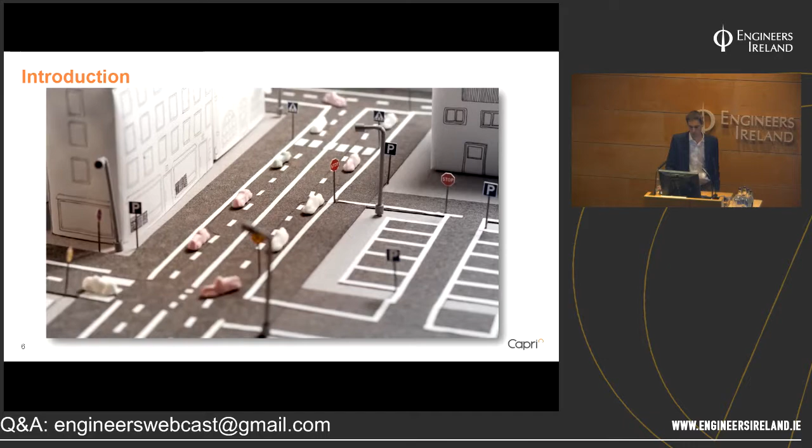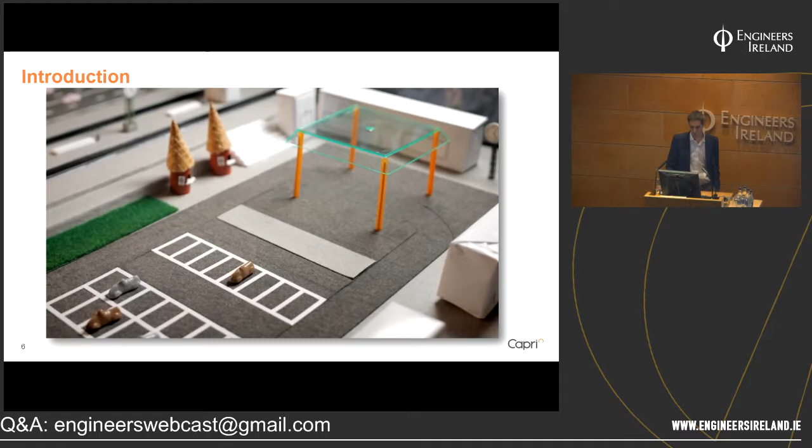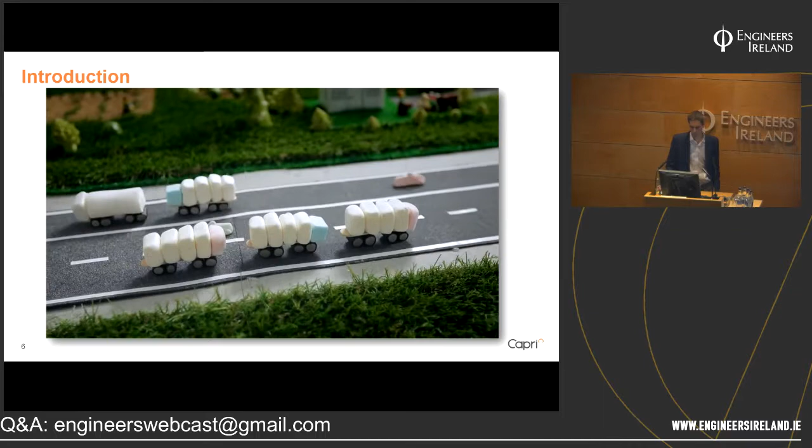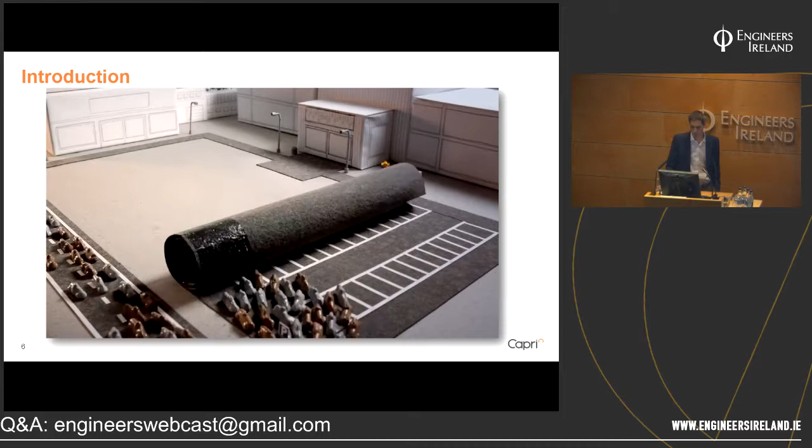Our city has grown up pretty much like all other cities, and it constantly changes. We become more people, the city grows, we build houses, more roads and parking lots, more vehicles. But human beings also need space. So what would happen if we drive away the cars of today and start using autonomous cars instead? Autonomous cars don't need any signs, and autonomous cars need less space, enabling wider sidewalks. It creates more space for us humans. And autonomous cars can drive and park themselves somewhere else. Look at this commuter station - you will be picked up as soon as you leave the train, because autonomous cars know when you arrive. So this reduces waiting times, less pressure, less stress, and autonomous cars will take you all the way home. Check out these autonomous trucks - they're driving close to each other because they automatically line up into road trains. This saves loads of energy for transport, and that is good for all of us. And since the autonomous vehicles communicate their arrival times with their destination, the loading and unloading can go so much smoother. And when the trucks don't have to stand and wait, they can use their parking lots for other things. Look at the front of the shopping mall, it's just a lot of parking lots. We would not need all of them anymore. We could do something funny - it could be a park instead, with an outdoor swimming pool and a cinema. This is a place to live in. So with autonomous cars, more space is created around the needs of people. Cities become nicer and more beautiful. Streets become safer, travel smoother, less noisy, more space for life. Well, it will be better.

Okay, what do you think about that? Does that make you think, wow, this is going to be the future, isn't it? Isn't it absolutely wonderful? The reason I like that video is because it gives one view of the world under autonomous vehicles, and it touches on a few key parts, like the autonomy side of things, the connectivity, the land use, some of these different benefits. But in my view, it certainly puts it through rose-tinted spectacles and sets out what the future could look like. And really, through the Capri projects, we're trying to understand some of the practical implications of these things, and importantly, how do we actually achieve some of the benefits reported here, rather than it just happening through osmosis naturally.

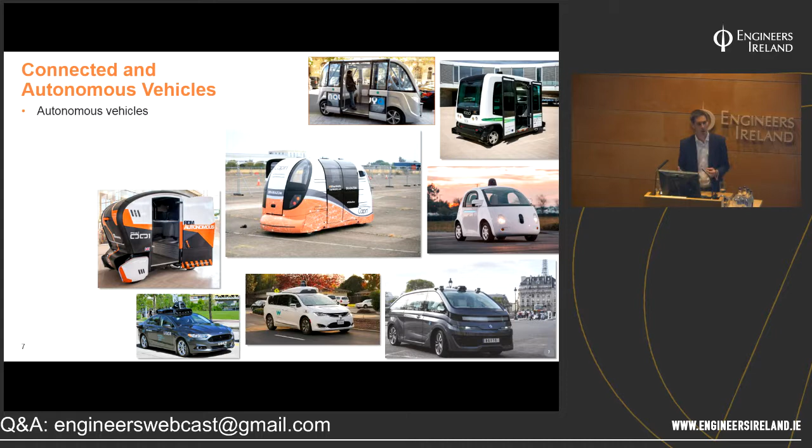Some of them do have a steering wheel in there, and a driver might be able to take control of the vehicle at certain times. I'll come on to that in a minute. But principally, the vehicles are driving themselves, and they have sensors built into the vehicles so that they can see the world around them, and importantly, they know where they think they should be within that environment as well. So that's the first thing, they are autonomous vehicles.

Second is that these vehicles are connected as well, and often you talk about CAV in one - connected and autonomous vehicles. You talk about these in the same breath, but actually they're very, very different aspects of future technology and the impact that these things will have.

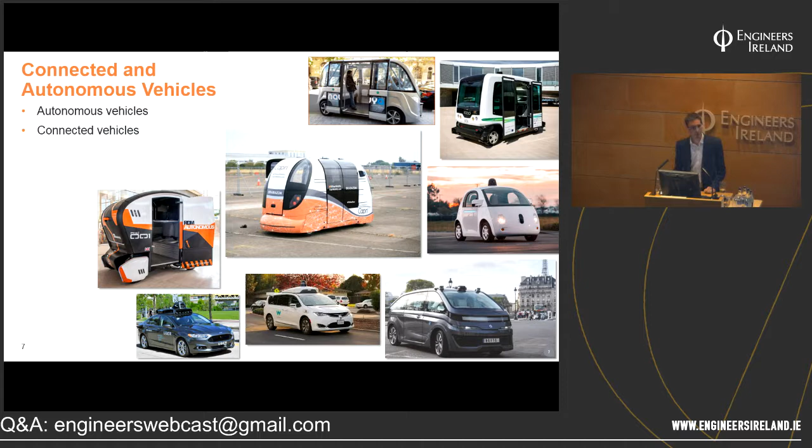Connected vehicles are vehicles which are perhaps connected to each other, talking and communicating to each other. They might be connected to the infrastructure around them as well, and the infrastructure might be talking to them. Some of these things are happening already, but in terms of how the technology can develop further, there's tremendous potential for additional connectivity within vehicles, and also connected not just to other vehicles and the infrastructure, but to the people as well. So the vehicles might be connected to people that might be hailing the autonomous vehicle, or they might be actually connected to people within the vehicle, within the pod, providing an enhanced experience to those people in there.

Thirdly, lots of these vehicles are electric. This is the way lots of the vehicle fleet's going, a move gradually from petrol and diesel over to electric vehicles. And we're really seeing, in terms of the technology uptake, probably the electric part, very much now on a practical basis on our streets. In terms of the actual range, anxiety seems to be coming down. And all of these autonomous vehicles which are being trialled and tested, the vast majority of them are electrically powered.

And the fourth part here is less about the technology on the vehicle, but some of the enabling technology which might allow a different way that these services are provided to users of transport. Principally, this is the idea of shared ownership of vehicles. So rather than owning a vehicle in its own right for yourself, vehicles might be shared or pooled. And again, we're seeing this being used more frequently, and the uptake of these is happening quite rapidly, particularly in busy city centres. And then shared trips as well.

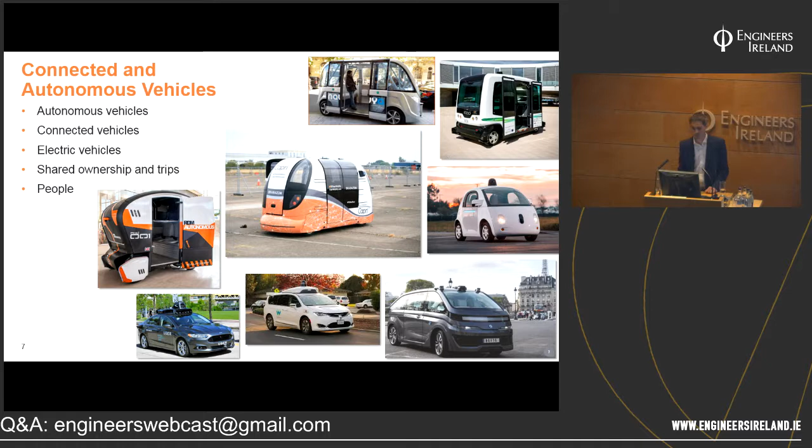So that's 5 key elements that are important to distinguish apart from each other.

In terms of the key benefits, the first one is safety. This has been reported lots in terms of the development and research funding going in. There's a famous statistic that around 90% of accidents are caused by human error. If vehicles are autonomous, in theory you can have a safer transport system and accidents could be reduced. That's one of the proposed benefits, particularly linked to autonomous vehicles. Some connected vehicles can also help improve safety.

Second one is congestion. Less so on the automated side potentially, but maybe if vehicles are driving closer together. In terms of the coordination of vehicles in a city centre, or the preemptive nature of understanding what trips people might want to take, and a more efficient transport network, CAVs could in theory improve congestion within our road network.

Productivity - for automated vehicles, people who are driving manually, that's the task they're doing in the car. If they're no longer driving, they have much more time on their hands, and so in theory they can be far more productive, whether from a work point of view, a social point of view, or a relaxing point of view. Time can be pulled back and used for other things as a result of automation.

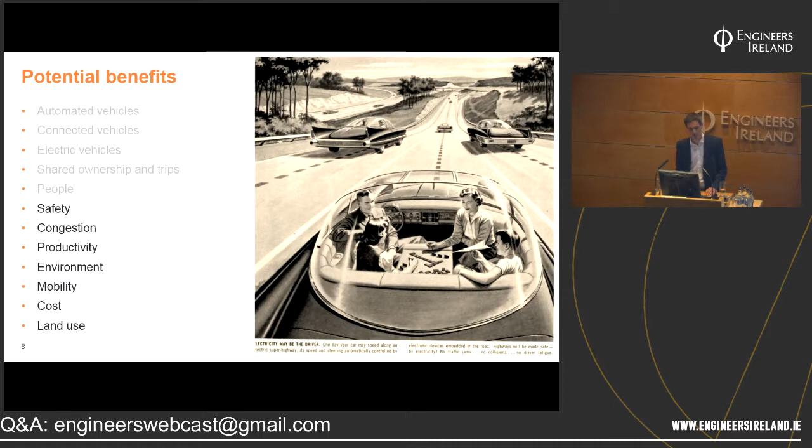So that's 7 potential benefits which are reported amongst governments, within the media, and within various researchers as well. I think it's important to think that some of these benefits - we're not actually sure whether they will be benefits, and when you try and flip it around the other way, sometimes you might think it could have the opposite impact. For example, safety.

A few people were umming and ahhing when we first had the poll at the beginning. If autonomous vehicles aren't safe and they're rolled out across the world, what kind of impact will that have on our safety record? 90% of accidents are caused by human error, but what kind of new errors might be introduced as a result of autonomous vehicles if they're not done safely? Cybersecurity attacks, for example, either on the vehicle itself or in the cloud and communications, could have detrimental effects as well. So that's an important part to consider as part of the paradigm.

From a congestion point of view, we talked about easier access to the transport system.

Then potentially more people could be travelling, so potentially more vehicles on the road, and congestion may actually start going up. You can sort of flip lots of these different assumptions on their head.

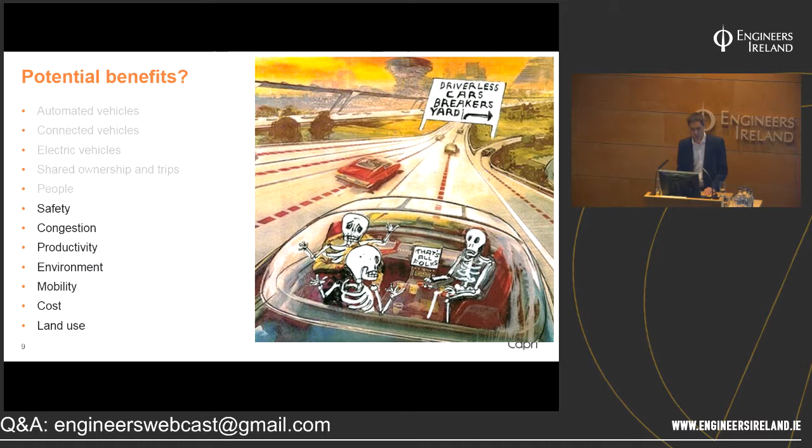The assumption is you take the driver out and the cost will immediately reduce. But actually some of the operational costs behind the scenes with autonomous vehicles, simple things like maintaining the sensor sets, keeping the cars washed and clean and effective, is a big part that needs to be considered - a new additional cost which perhaps isn't so costly at the moment with manual drivers. All these things need thinking about when we're doing the research and working on the various projects.

Okay, levels of autonomy - who's familiar with levels of autonomy in terms of automation in vehicles? A few people. I'll touch on this briefly, but the scale goes from left to right, from vehicles which are not very autonomous at level 0, all the way up to level 5, which is absolute full autonomy.

These first three levels represent the way some of the vehicle fleet is moving at the moment, in terms of assisted braking. Some vehicles currently have lane departure warnings - for example, when you're driving on the motorway it might give you a warning. But critically, you are still driving the vehicle in these three levels, level 0, level 1 and level 2.

You are always in control of the vehicle, but you might be given cues or information from the autonomous part of the vehicle telling you, by the way, you need to think about this or that. Similarly, adaptive cruise control and lane centering, things which might aid a driver, are part of level 2. But importantly, the driver is always in control of the vehicle.

That's the blue section. Then we start moving over to the interesting parts - level 3, level 4, and level 5. This is where the driver at times can just take their hands off the steering wheel and the vehicle will be driving for you.

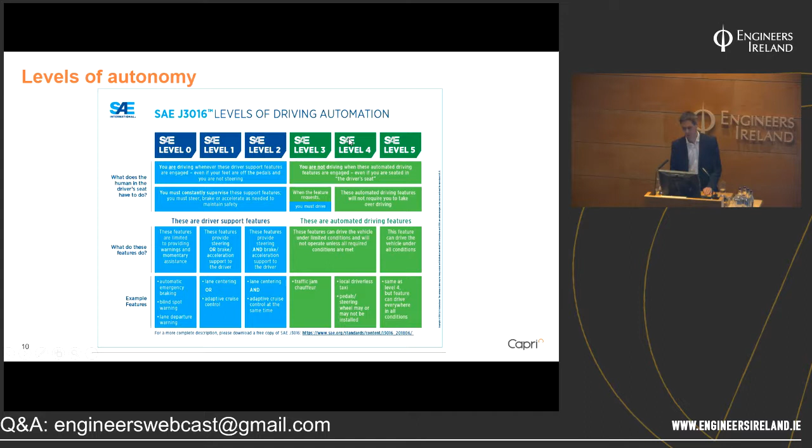The focus of the Capri project, and lots of the projects at the moment, is looking at level 4 in different operational design domains.

In terms of CAV time horizons, this is research done by the Transport Systems Catapult in the UK, looking at different uptakes of CAV at different levels, principally level 3 and level 4 and 5, under different scenarios: a high uptake, which is the dark purple and pink here, a middling uptake, a low uptake, and a very low uptake of CAVs. The percentage here is the percentage of sales of CAVs within this particular category.

So where are we now? We're up to almost 2019 now. Some of these predictions probably look quite high at the time, but this is government research which has been put out, and these are the timelines we're working to at the moment.

Sometimes with technology you might find a projection which is quite steady, but with rapid technology uptake, it might take time, then suddenly shoot up rapidly rather than a gradual start. So at the high level here, we're talking up to 100% of vehicles being level 3 or level 4 by 2035. But even the very lowest projection is talking about 5% of level 3 or level 4, so we can extend that out further into time as well.

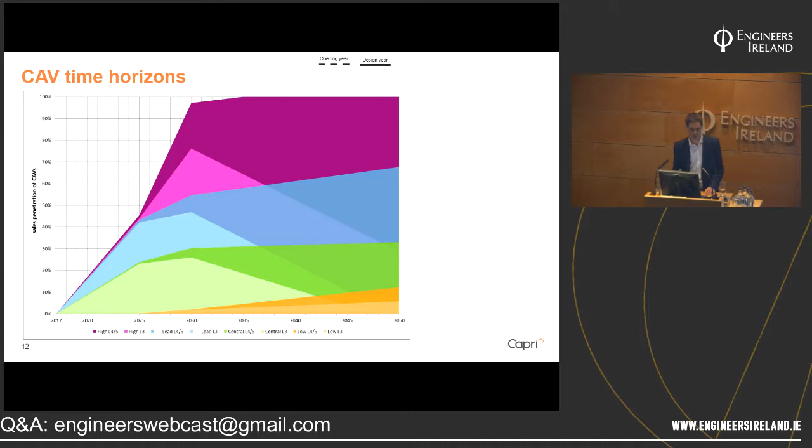What we can do is overlay some things which might be happening on the transport side as well. The Cherrywood development in Dublin - I was with Hines in 2018, who are the developers for that site, and we're looking at around 2030 when that site might be fully built out. So there's lots of planning going on for these developments now.

The master plans are happening, but when you put these master plans, and when they might be fully built, in the context of what might be happening in the transport system, then even in the second to lowest uptake scenario, we're still seeing about 30% of vehicles might be level 3 and level 4 combined. So we really need to be planning for these things now in order to get the infrastructure right.

Similarly, the longer term Project Ireland, and there are transport subsets to this as well, in 2040. That again seems like a very long way off, and the way vehicles are going to be moving on the road is going to be quite different.

And similarly the Metro Link, 2027. I was getting a taxi from the airport this afternoon and asked the taxi driver about it, and he said, 'Is that going in 2027?' He said, 'No, never, no.' But hopefully that will be in 2027.

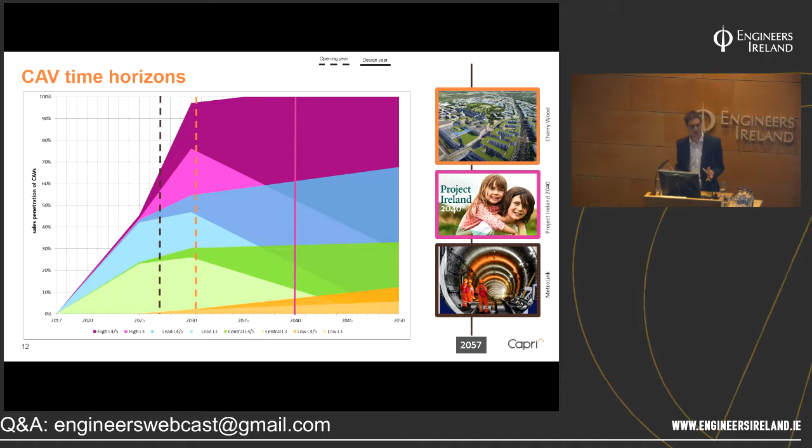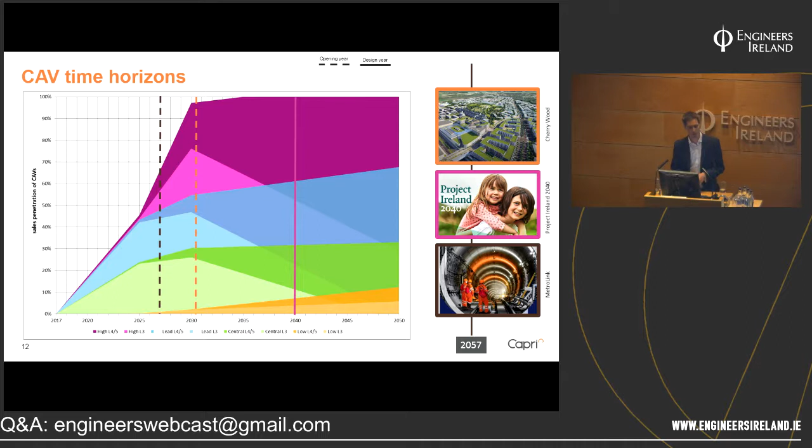But then in terms of the business case, which needs to move out - if we're talking 30 years from that point in terms of bringing the business case together, that's 2057. It's off the scale here, and as I said, understanding the impacts of CAV is going to be really important to help with these business cases and designing the future of the transport system.

Okay, so moving on to the Capri project - that gives a bit of background to connected autonomous vehicles that I've come across in the project so far. But this is specifically now about the Capri project.

The Capri project is an initiative funded by central government in the UK, who are investing in the testing and development of connected and autonomous vehicles, with the majority of focus from CCAV's point of view being in autonomous vehicles. There have been a series of funding rounds, probably for the last 5 years or so, where consortia have been able to bid for funding. It's part funding - funded by central government, CCAV, and the consortiums as well, in order to do trials and testing and development, research and development of CAVs.

The Centre for Connected Autonomous Vehicles, CCAV, has been set up as a mixture between the Department for Transport and the industrial side of central government. This is a nice amalgamation, recognising that research, development and the benefit to UK PLC from understanding and developing CAVs is really important. Those two parts of central government policy are coming together to fund some of these initiatives.

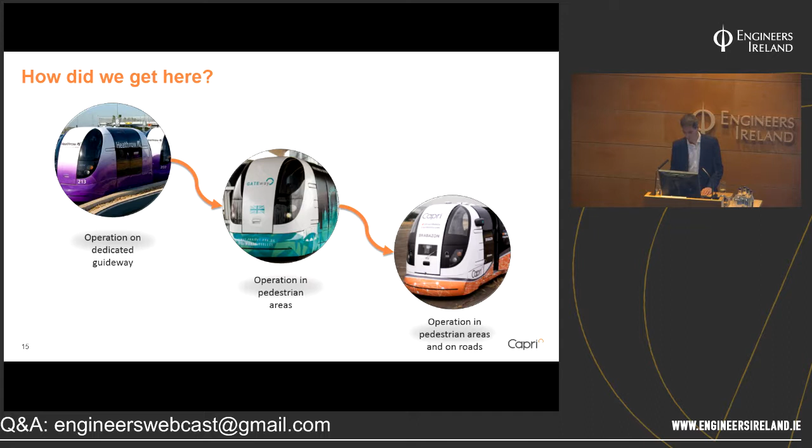The objectives of Capri include the dual mode pods working in pedestrianised areas and on roads. I think really the goal is to see how these pods need to work to operate on roads, which is where we're looking to implement and use them. But it's important to have stepping stones along the way in terms of research and development, hence the need to start in pedestrian areas, then look at the transition, and then move on to roads.

The key partners in the Capri project - building the pods, looking at the regulatory side, crashworthiness and so on - is Westfield Sports Cars, who build and manufacture the pods as well as their own sports cars. Heathrow, who we talked about with the pods implemented there, own the IP for the pods and the pod design, so they're certainly a stakeholder with requirements within the project.

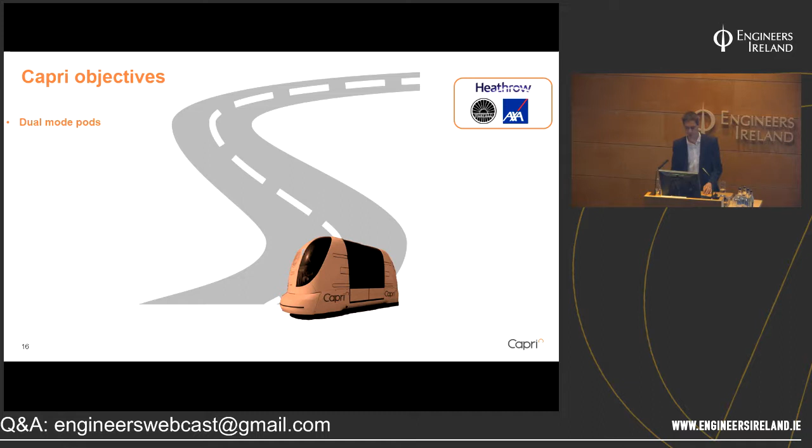And then AXA, the insurance company, are heavily involved in this side of things - insuring the pods and making sure the safety case is all acceptable. Importantly, the pods are autonomously controlled. Westfield are developing what's called their ACS, the Autonomous Control System, to be built onto the pod itself. I'll talk about that in more detail, I think, in the next slide.

Other aspects of the Capri project we're investigating - we talked about the connected side of things and importantly the ride-hailing side of things as well. We've got a whole work package looking at how users might hail a pod, how they might pick one up, the user interaction to pick one up, how they maximise using the pod, both hailing it and when they're in the vehicle. They've got more time on their hands - how can we improve their user experience once they're in the pod?

Connected to that, we're looking at how we can integrate with the Internet of Things, both uploading data to the IoT and extracting it down as well. How can we make best use of weather data or traffic congestion data to optimize the routes the pods are taking? There's a fleet management system controlling all the various pods. On our project we're only trialing 4, but looking into the future, say you've got 100 pods altogether, how do you best optimize them to pick up the right people at the right time, guaranteeing their service while minimizing your own costs as a pod and fleet operator?

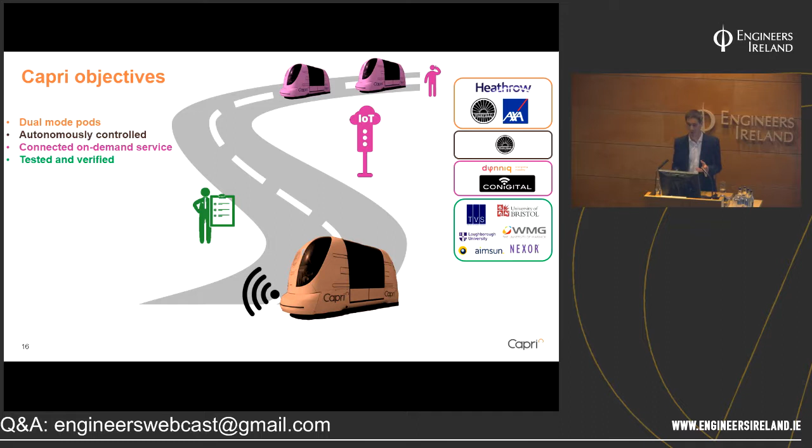I'll show you some videos later on, but besides physical testing, we're also doing what's called virtual testing. This is being able to test the pod in a simulated environment where we can throw all sorts of different characteristics and scenarios at it. It allows us to test a far broader range of scenarios than you could test in real life, far quicker and to a far greater extent.

Last but by no means least, we're looking at the user side of things for these pods as well. The first 4 parts are quite technology-led, but it really needs to be user and client-led too - what do users and clients want from these kinds of services? This is more of a softer research side to the project, but absolutely no less important. ESP, based in Scotland, are leading on that work package, as well as some of our trial locations where we're doing primary research with participants.

The overall aim of the project is to write the blueprint for what a business case might be for these pod services in the future, and to establish what's required to have a market-ready mobility service from a shuttle and a pod point of view. AECOM's role is to project manage and lead the whole project across all those different areas.

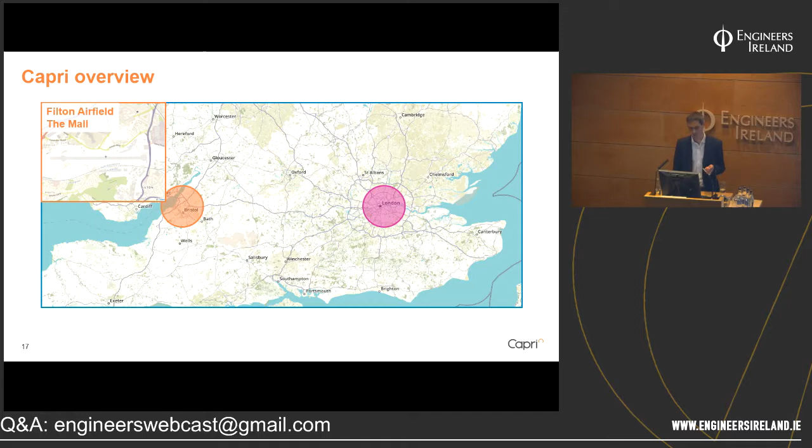We're doing 4 trials over the course of the project - 2 in Bristol, in the West Country in the UK, and 2 in London. The first trial is at Filton Airfield, a disused airfield site, which allows us to do physical testing in a safe way with no public vehicles around. Next we're going to the Mall in Bristol, a shopping centre, which will be our first public trial, taking passengers from one end outside to the other end. Our next 2 trials are at the Queen Elizabeth Olympic Park in London.

I'll talk briefly about AECOM's role on this with a project lead.

Importantly, we're integrating all those different elements I talked about across all those work packages and across those different disciplines, and it gives us an opportunity to really check and challenge and shape all those different work packages, but importantly, make sure that they all come together and we get the best value from them all.

We're also looking quite heavily at the exploitation side of things of the project. So this is in terms of the brand for Capri, or how you might sell and create a business case for this kind of service into the future.

Okay, so here's our Capri pod which we're using on the trials. Just some key stats here in terms of passenger capacity. They can only take 4 people, which is based on the Heathrow pod. So we're talking about a small number of people, but that in theory means you can be a bit more agile about where it goes and different people that it can pick up and carry around.

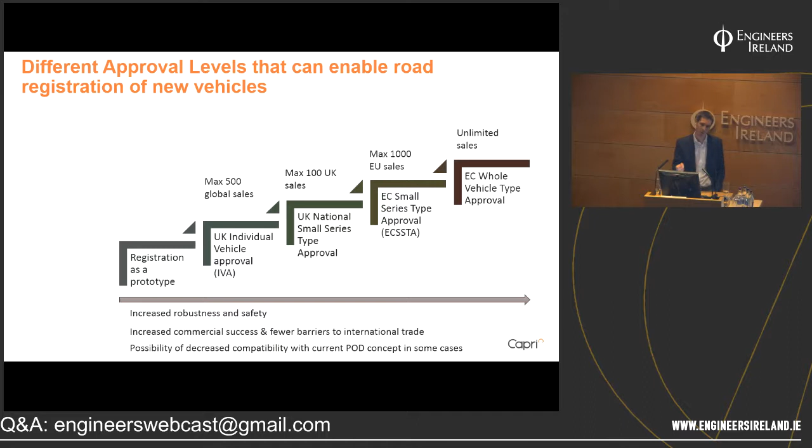Moving towards its own vehicle classification. We think, particularly from a pod point of view, if we can develop a new classification for pods - there are currently standard vehicle classifications, whether it's a bus, a passenger vehicle, a quadricycle, for example, which all those vehicles have to follow. When you look at them, a pod can't fit within any of them. So we're trying to rewrite the rule book and define a new set of vehicle regulations.

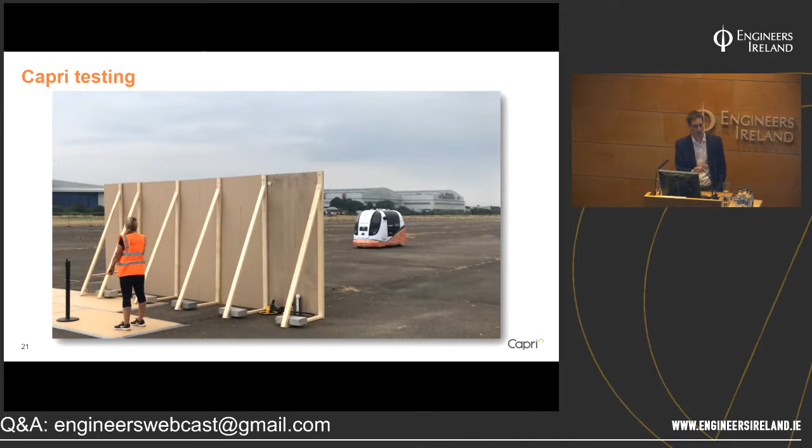But where those regulations will fit in terms of local regulations or global regulations, that's something we're looking at. Different options are open to us - we can register as a prototype vehicle, for example, which would allow us to go out on the road straight away. But in terms of mass sales, we really need to be getting what's called EC whole vehicle type approval, and this is very much at the UN level, the global level, which can coordinate all those standards. So there's a whole range between that, and that's something we're working on with the project and the regulators to try and define the best way forwards.

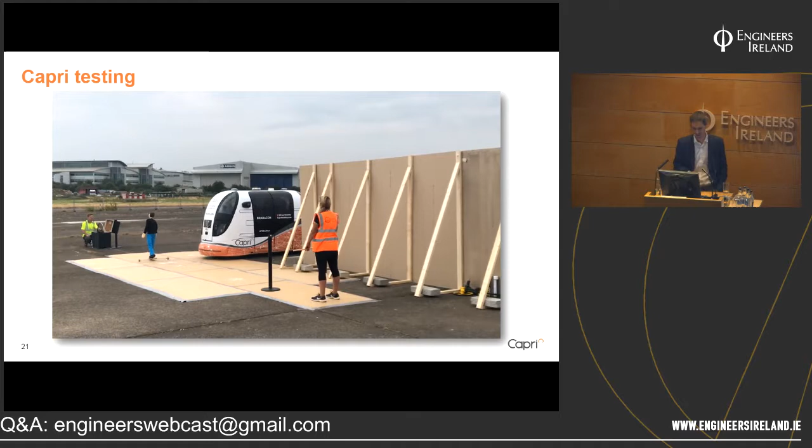The physical testing that we've been doing on the project is very much based on the trials which we know we're going to be doing. With those trials, we've looked at the safety concerns, and then we've tried to do testing based on those safety concerns. I think that's a very important approach, rather than just doing all these different tests without thinking - actually the pod might not be operating in that particular environment. So we've looked at the particular safety concerns and then come up with some tests around that.

Here's an example of testing for the Mall. We had a concern that there'd be people coming out of concealed areas, so we developed our own testing environment - a bit of a Heath Robinson setup with a person coming out on a pulley system, but that allowed us very controlled tests. That person was coming out at different times, different speeds, and the pod was approaching at different speeds. We've done a whole range of different tests, not just in that particular scenario but others as well.

To give us the physical confidence the pod should be doing what we think it should be doing - that's what you call system testing. This is saying we think the pod should respond in a particular way, and then we see if the pod does respond in that way. That's a good way of doing tests where perhaps the manufacturers are concerned about their IP or their sensors - we're actually testing the system as a whole rather than looking in detail at all the different sensors which they might have IP concerns about.

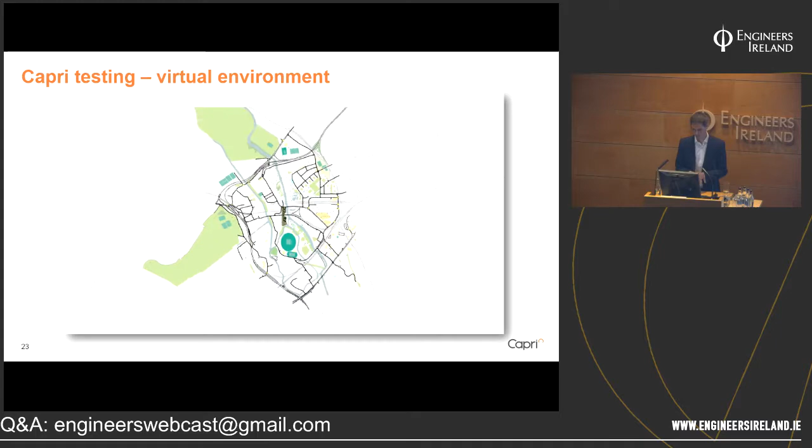Here's another sort of testing that we've done. We had some concerns about the pod making a right turn and being able to see different people coming across its path whilst it's making a turn. That was fairly simple, but we've had some different tests and things we've been able to do in that regard as well.

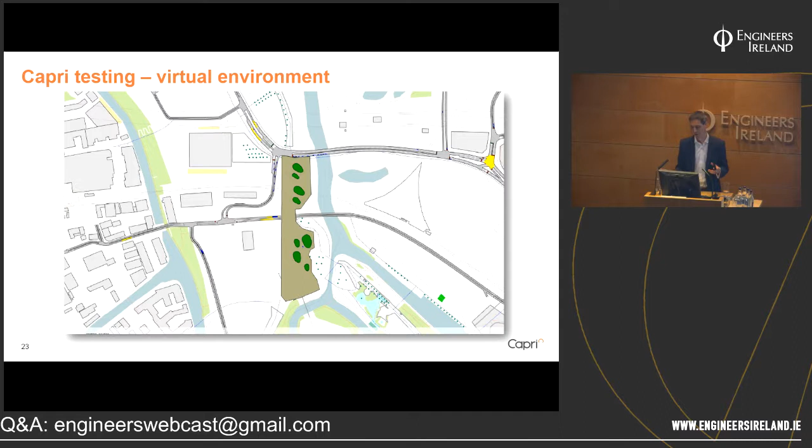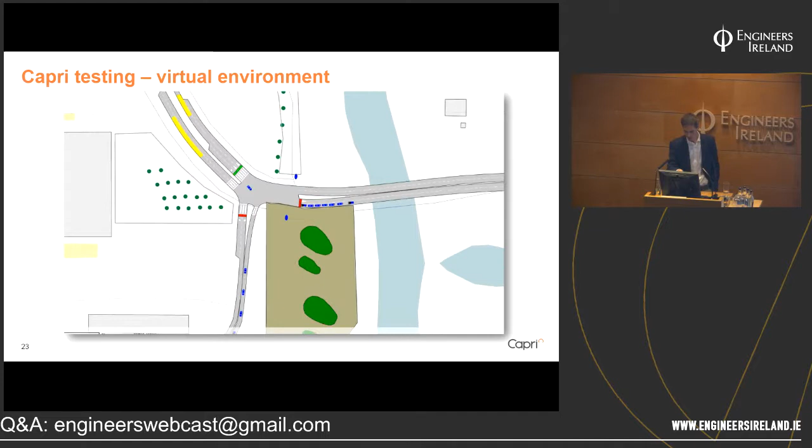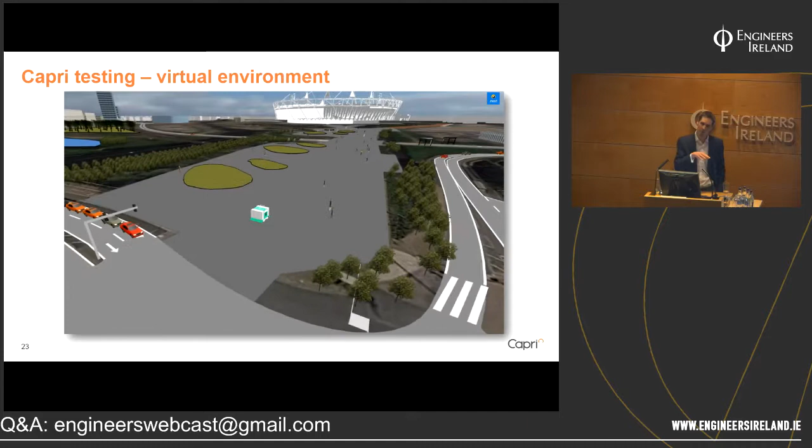I'll talk briefly about the virtual environment. That's the physical testing - it's also really, really important, and this is something the government and regulators are looking at in great detail and recognizing as something that's going to be really important: doing testing in a virtual environment. This is effectively taking the autonomous control system, putting it into a computer, simulating the various sensor feeds that might come in from the real world in a simulated environment, to test and see how the autonomous vehicle responds. Here I've got a video of our Capri simulator in our virtual environments at the Olympic Park.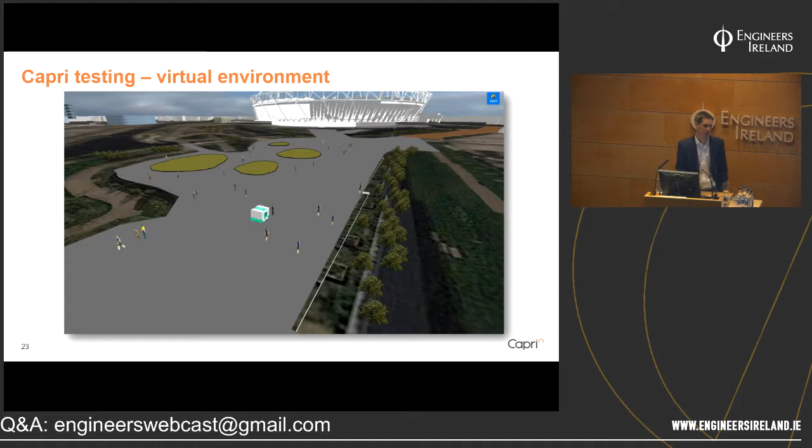This might not be familiar to all of you - microsimulation modelling, which might be used from a transport planning point of view to look at congestion impacts and the impacts of different schemes. Well, this is a microsimulation model, where one of the vehicles we're modelling is actually responding according to how the autonomous vehicle would respond depending on how they see the world.

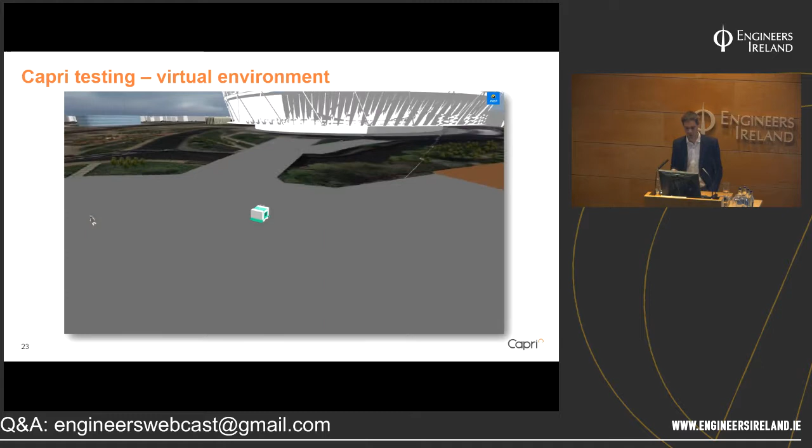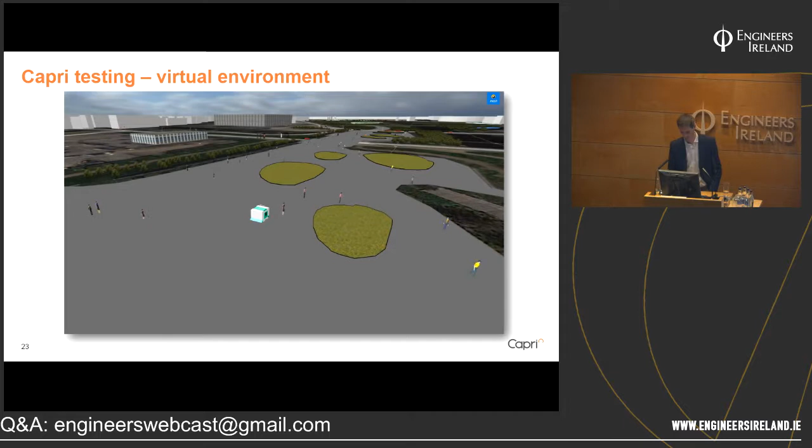So you can see this vehicle here is our autonomous vehicle - this looks like a road sweeper. I've tried to get them to update the 3D model, but here we're able to model these things in a 3D environment and test how they respond.

The benefits of this are that with really powerful computing you can test many different scenarios, and you can tease out what's called the corner cases - situations where in physical testing you just wouldn't be able to pick those up.

So you can really stress test and throw as much as you like at the autonomous control system in a safe way to get a really good understanding of whether it behaves as you'd want it to, and that's going to be part of the regulatory process for the future - there's no doubt about it. That's more from the safety side of things.

This could also be used to test transport planning impacts. So if you have a fleet of pods or a fleet of autonomous vehicles, you can test them in this environment with their responses to see what impact it might have on the road network, and how they might be coordinated and managed.

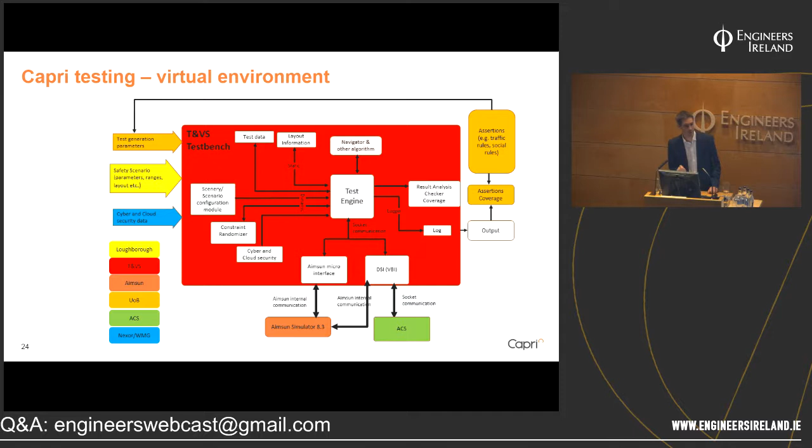I won't go into this in detail - this is our test bench and how the different elements all fit together within our virtual environment. The key bits to pick up here is that different partners, different knowledge and understanding are all feeding in at different parts, but it's important to understand this range of scenarios that you want to test.

These are defined in the yellow box, and then the test bench is set up which can model those scenarios and see what the impact is. Coming out the other side, based on those results, you modify some of those scenarios - if it didn't behave well, you change it slightly to see if it behaves better or worse under slightly modified conditions. This is all automatically done, and there's some AI in there exploring this terrain to try and find those corner cases and tease out where the real difficulties might be for these systems.

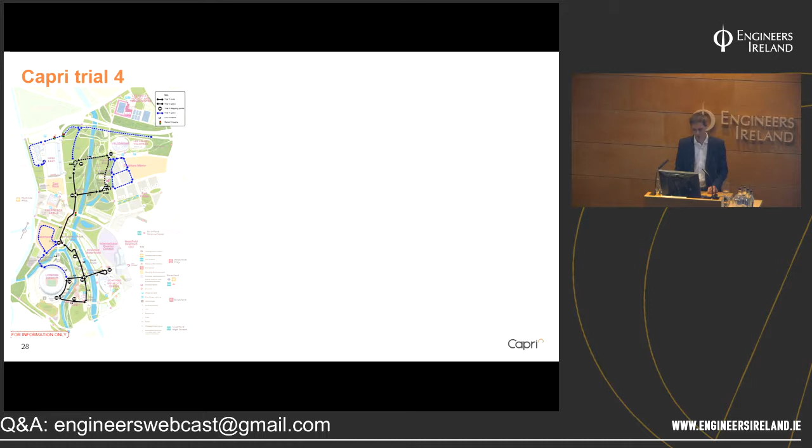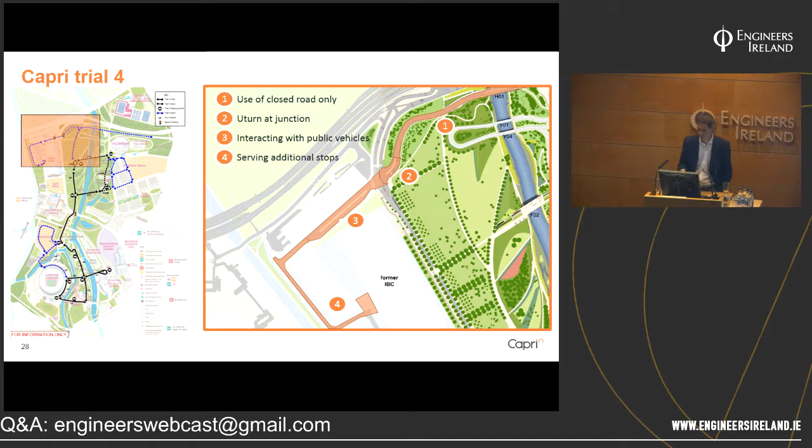Okay, our trial 4, our on-road trial, just to give you a brief understanding of this, we're looking at the north end of the Queen Elizabeth Olympic Park. This section here is all in the pedestrianised areas of the park, very wide footways, so not narrow at all, able to operate well. And then we want the pod to be able to come up here and operate on roads near this university building.

We're currently looking at different ways in which the pod would need to navigate through this junction, a public junction with real life traffic out there. It's really quite incredible that we're going to be taking an autonomous pod through that vehicle classification process, getting it signed off, and actually running these pods on the public roads in January 2020. But we're looking at different options and designs for that trial.

Part of the project, rather than just owners of sites, we're engaging with potential users as well, understanding their requirements, how they might want to use driverless pods and shuttles in the future. We had a day in Bristol on a Saturday where about 80 members of the public signed up and came along to our scoping session, what's called our co-design event, which is absolutely amazing uptake for a Saturday, but it shows the level of interest and enthusiasm people had. And we had such a broad spectrum of people coming too.

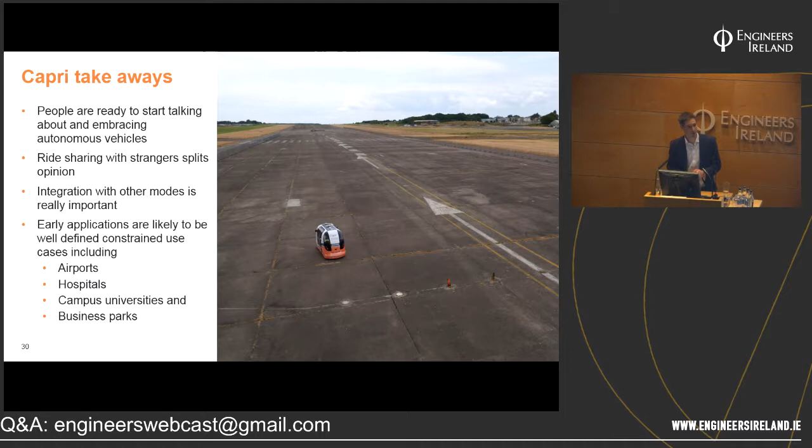So the key takeaways we've got are: people are ready and they are talking about embracing autonomous vehicles, and that's an absolute top level thing that's come out from the project, whether it's site owners or members of the public, they are fully embracing this. Ride sharing with strangers splits opinion, understandably, but some people are far more optimistic about it than others. So it's interesting to see in what situations people might be more willing to do that.

Very importantly, the integration of pod services with other modes is really important. How does it interface with existing public transport systems, for example railway stations, bus stations, other areas? So it's actually an integrated part of the transport system rather than just a solution in its own right. And some of the early applications we're looking at are within constrained operational design domains in terms of airports, hospitals, campus universities and business parks.

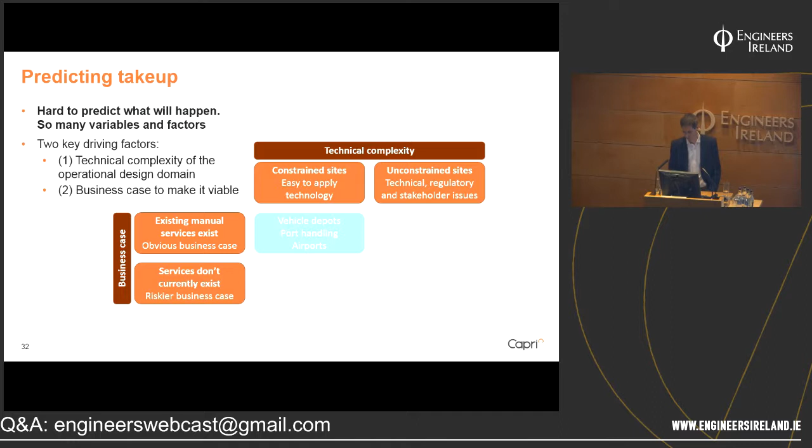And then on the other axis is the business case. Does it make sense for autonomous pods, autonomous vehicles to operate in that way? Two key areas: first, does an existing manual service already exist, is that service already being provided, like through a taxi service or a bus service? Or does that service not currently exist at the moment, is there not a current demand for that kind of service or use case?

So mixing these two bits together, we can come up with an idea of potential use cases that show up reasonably well. So, reasonably constrained sites where there's existing manual services which work. Vehicle depots, for example, they're off the highway. Buses need to move around at night time for them to be serviced, for them to be cleaned, and so on.

That is happening now in terms of these vehicles being autonomously driven to help reduce costs and operations. Port handling and airports—we're seeing more autonomy around airport operations as well.

Moving down, still constrained sites, but some of these services don't currently exist from a business case point of view, perhaps university campuses, business parks, and hospitals. These constrained sites aren't terribly complex to operate autonomous vehicles on, but the business case is a bit harder to make stack up.

The third one is a much more challenging site from a technical point of view, but these services do exist currently in terms of public transport, private transport, buses, and taxis.

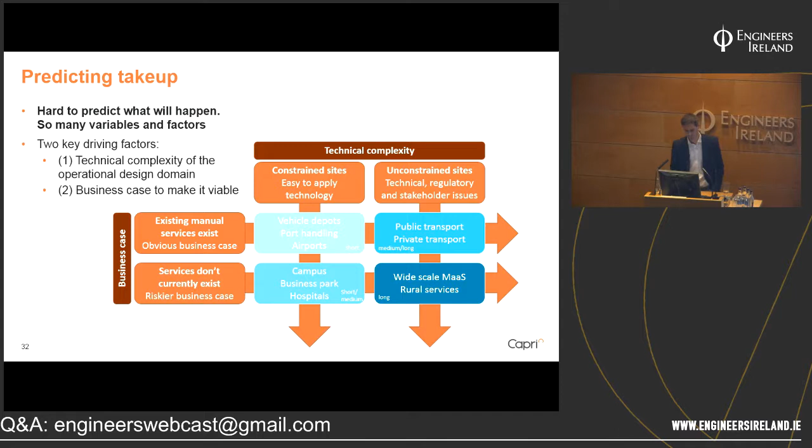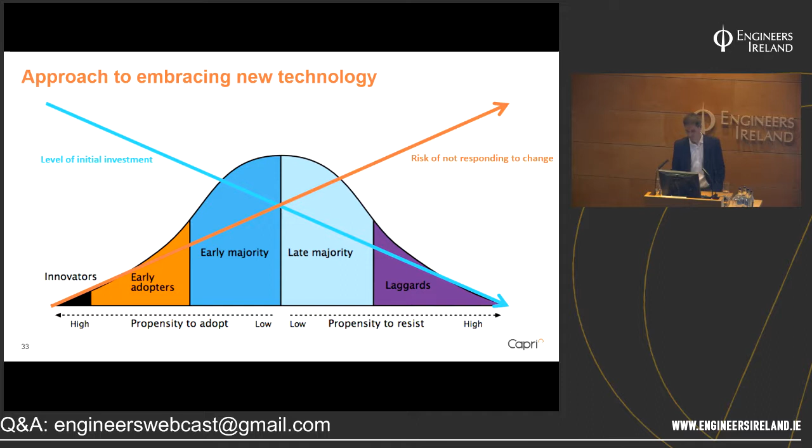And the final one is more the bottom end of the curve, going back to the initial video—more wide-scale mobility as a service, people just being able to pop up and pick up a vehicle, it drops them off, the vehicle goes around somewhere else. This is a completely radical situation, being in an unconstrained site in city centres as well.

So this gives an idea of how we might see these services evolve: short term in the top left, short-to-medium term for campus, business parks and hospitals, medium-to-long term for public and private transport systems in terms of mass rollout, and finally longer term wide-scale MaaS and particularly rural services, which are very challenging from a commercial point of view.

Okay, I'm conscious of time, so I'll probably skip over these. They can be made available online, but they give an idea of how you might approach risk in terms of autonomous vehicles and how you might respond to risk and get the investment right.

Just some key areas to get involved—I've tried to categorize it into five areas. Firstly, monitor what's happening. This is a rapidly changing sector.

So in order to understand what's currently happening, you need to be talking to people, monitoring what's happening locally, nationally, and internationally, and look at these trends and see how they might be impacting you in the work that you're doing.

Engage with people, engage with researchers, engage with the technology and the applications to understand some of the timescales and what might be happening.

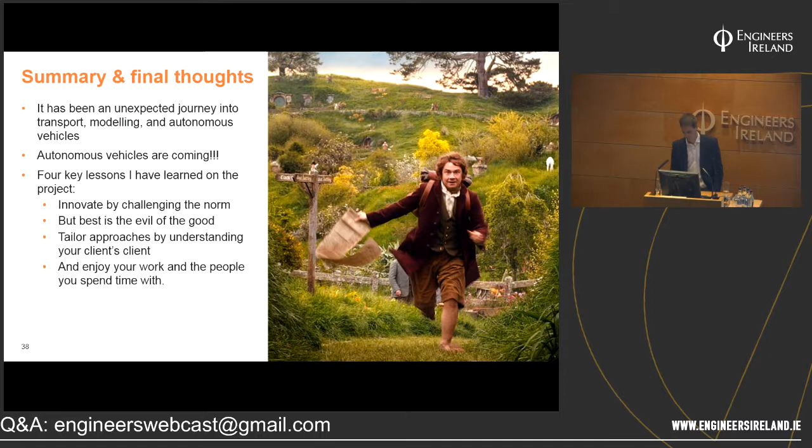Working with 19 project partners is a challenge in itself, no doubt about it, but some key lessons I've learned, outside of the technical side of things, I wanted to share. Firstly, you've got to innovate and challenge the norm, and that's certainly what's happening with autonomous vehicles. But even within that sector, it's been really important to challenge some of the echo chamber things that can happen, and ask some quite challenging questions within the industry itself.

So try to achieve the best, but at the same time, best is the evil of the good, as I've found many times—sometimes you need to knock it down a level just to help things progress and move forward. We always need to be tailoring approaches, understanding not just the clients, but the client's client as well. And finally, most importantly, we really need to enjoy the work that we're doing with the people involved.

That's one thing I've found working with 19 partners—it's been a real joy working with some of these people, and it's been really good fun.